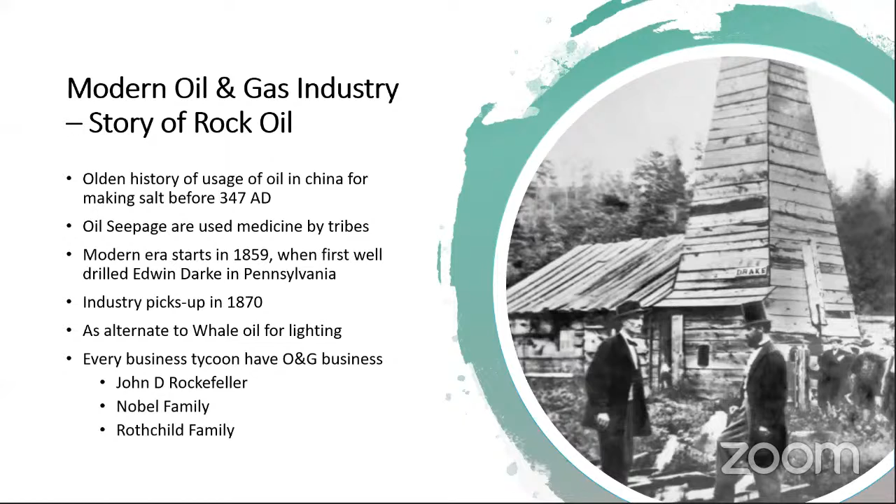And as of today, you would have heard stories that the oil price has collapsed. Maybe in the lockdown period, when it started, the oil was traded at a negative rate, negative value, because the US did not have storage space. They had to dispose of the oil, so they were selling it at negative value. All this stuff you would have heard.

And all this dynamic news that you are hearing is not something we heard only this time. It was historically common that oil prices are always dynamic due to different reasons. So when the oil industry started as lighting for the lamp in the 1870s, it faced huge amounts of dynamics because of overproduction. At that time, Rothschild and John D. Rockefeller, the main persons in that industry, tried to consolidate the industry and suppress the overproduction to control the price. It's normal in the oil and gas industry - every time this dynamic happens due to overproduction.

And in 1882, it happened that Edison came up with the light bulb. When Edison came up with the light bulb, since the usage of oil was only for lamps, people said that the oil industry was going to die - there was nothing more to it.

But eventually, before the light bulb spread around the world, Henry Ford came up with the Model T car, which used petrol as fuel. And there was a good scientist who found the way to refine higher valued petrol from crude oil. So from then on, there was a rising consumption need for oil. Every car that Henry Ford produced, and then Volkswagen came into picture, there were a lot of automobile industries - the car needed fuel, and the oil and gas industry kept on growing.

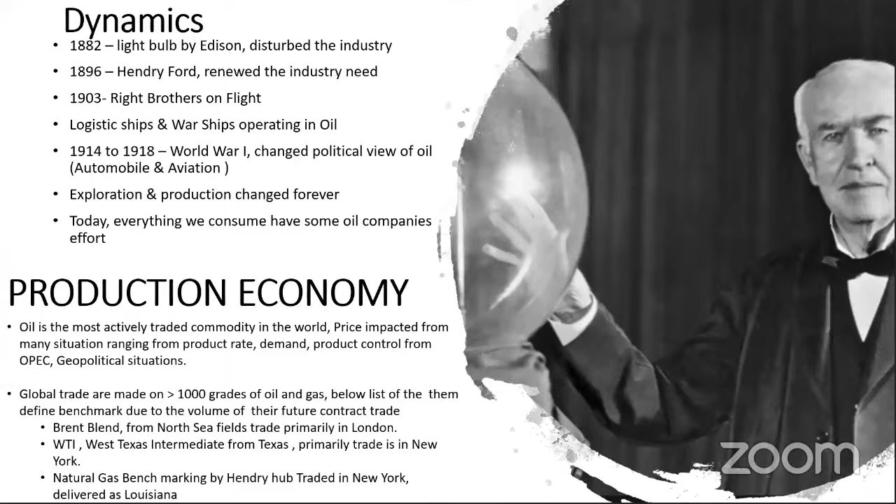So just to give a brief idea of how the oil and gas industry exists, they usually call it three streams: upstream, midstream, and downstream. What's upstream actually? Upstream is searching for oil - that's oil exploration. Once you find it, you have to produce the oil, meaning the oil is in the ground and you have to dig it and take it out - that's oil production. In the upstream section, there's a division called oil field services that provides services for people trying to find oil and take it out of the ground.

This upstream section can be located on the ground or in the sea itself - you may find oil on the subsurface of the sea or on the ground, so that's onshore or offshore. The midstream is the oil transportation technology. LNG is liquefied natural gas - you take natural gas, liquefy it, and transport it, because once liquefied, you can transport the highest volume of gas very easily. Then there's the pipeline - inter-country pipelines that run for thousands of kilometers across countries to transport gas produced in one place to another.

Today, people call the oil and gas industry 'in trouble.' Just to give you a brief introduction, the trouble is mainly in the upstream division, not in the downstream or midstream division. Even in this lockdown period, globally we had two LNG projects kickstarted. What this means is that the demand for LNG is already there in the market. Companies forecast it and are able to invest billions of dollars in that - and LNG is one of the very expensive projects in this list. So they're starting LNG projects even during this lockdown. You can consider that upstream industry production is higher, but in downstream we still have a long way to go.

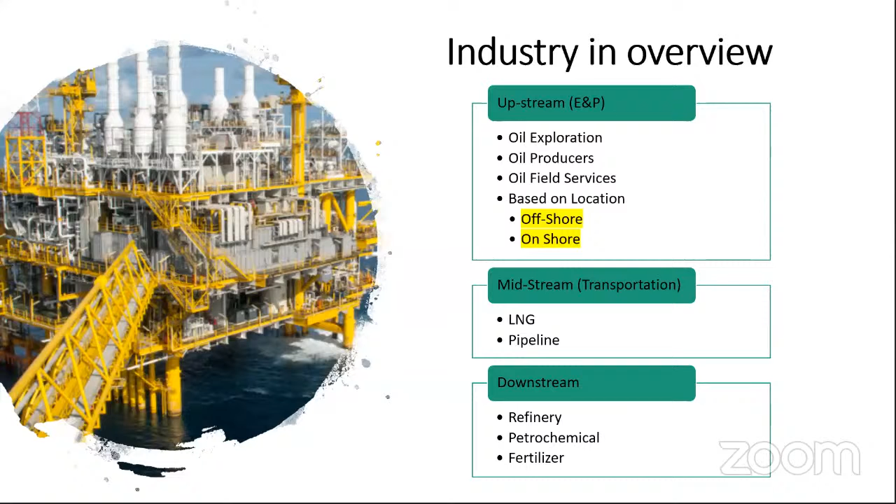So when I say oil industry, I told you about brief segregation of industry. Now you have to also know, in this segregation, usually any industry globally can be segregated into three categories. A company can be a product-based company. What it means is a company has a specified technology-based product and it is supplying the product. And a company can be a...

...project-based company. What is meant by project? A project has a unique start and a unique end, and the project is not a repetitive task. For example, if you construct a house, it's a project, or if you construct an office, or if you construct a factory, it's a project.

So the oil and gas companies can be a project-based company and a service-based company. What is a service-based company? It's a company that helps with regular operations. If you have to operate something, you have to keep on servicing it, so you may have a services company to help you there.

So any company can be a product-based company, project-based company, or service-based company. For example, when we say oil producer, who is producing oil from the ground, that's a production-based company. They are producing the oil and selling it. And exploration and drilling services, somebody who is trying to search for the oil and drill it and give it to somebody else who can produce.

For example, in the oil producers category, in India, we have GAIL. GAIL is a producer, and Cairn Energy, they are oil producers. And when we call it exploration and production, we have a company like Aban Offshore. What they do, in slang language, is kind of a borewell company. They have a borewell machine, they drill and produce, and provide you the final thing. Oil drilling is not as simple as water drilling, but it is similar somewhat.

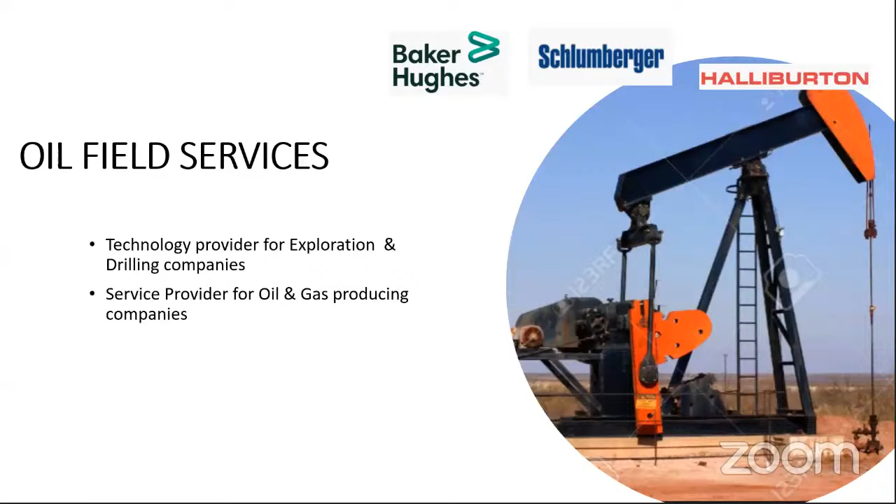Before we go on to what kind of products they make, we should also be aware of how oil is produced. Everybody would have heard the story: oil came from fossil fuel, maybe a dinosaur died and got stuck inside the ground and converted into oil. It's something similar—any organic matter buried in the surface gets decomposed and slowly converts into oil. And when we say slowly converted into oil, they call it a window.

As of today, we have never drilled the ground below 13 kilometers. Below 13 kilometers, whatever we see in our books is just what we see as per our knowledge, whatever we can do with seismograph, or whatever we can assume or postulate. The real thing is, we have drilled the ground just 13 kilometers of strike depth.

So for example, for oil, when you drill 2 to 4 kilometers, you may see oil at the surface. And when you drill 3 to 6 kilometers, you may see gas, because it is basically based on the temperature range. So when you go 2 to 4 kilometers, you may have a temperature range of 60 to 120 degrees centigrade, where oil may exist as oil, decomposing to the oil level and existing as oil. When you go still deeper, the temperature may slightly go up and you may have it in gas form. When you go further beyond 10 kilometers, mostly the hydrocarbon is going to get destroyed because of the temperature ranges. So any organic material will get converted into kerogen. The kerogen is slowly decomposed and converted into oil. And based on the temperature range or further decomposition, the oil may get converted into gas. That's how it exists.

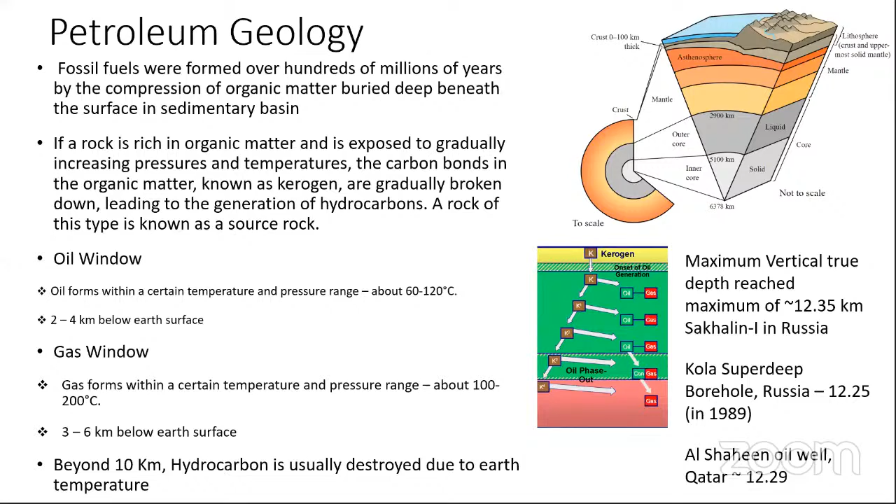So how is oil present inside the ground, and how are you able to take it out? When you say oil, you need to have 4 things. Only if these 4 things exist is there a possibility of oil. They call it a trap. A trap is something really like a trap. So you need to have an impermeable layer.

You need to have this impermeable layer. An impermeable layer is something you can assume like clay—if you have clay and pour water on it, it will not move to the other side. That's an impermeable layer. Then you need to have a permeable layer of material—this you can assume as coarse sand. And then you need to have a source rock.

The source rock is organic matter that is going to get converted into oil. Then you need to have a reservoir rock—this is nothing but a porous material, like sand, which can hold oil or water like a sponge. And then you need to have a seal, which is nothing but an impermeable layer that closes the oil or gas formed as a 3-dimensional closure.

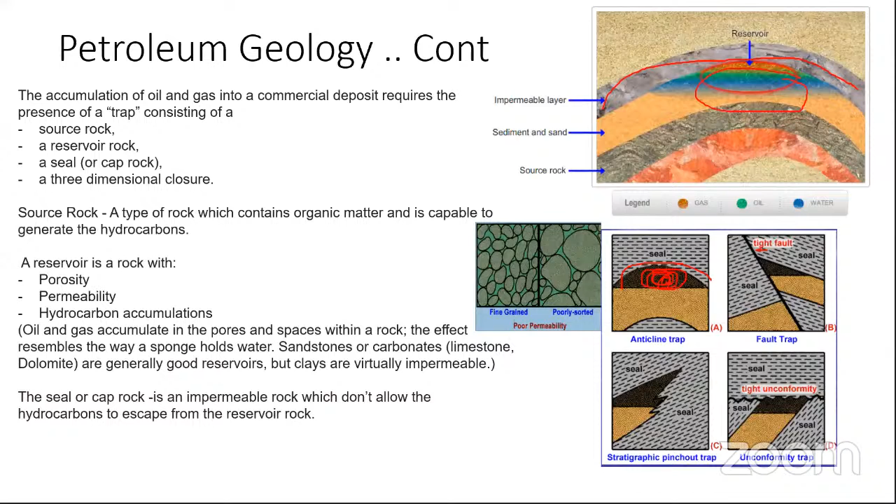Basically in the olden days, in the 1860s or 1870s, when they first drilled, they tried to find the seepage. Because of the presence of an oil trap that is already filled, the oil may seep out to the floor. When it seeps out, people would dig around that area and try to find if there's oil present. That's how it started in the olden days.

But now, how do people do it? Now people use the seismograph. You would have seen Jurassic Park - they drop a big bomb and put seismic sensors all around the area to see how the vibration is happening. Based on that, they understand what is in the ground. That's what seismic acquisition or seismograph is, done in that way.

So what we do is make vibrations in the floor and see how the reflection is happening. Based on that, we plot how our subsurface is present. When we know and have plotted how the subsurface is present, we may be able to understand the level, like the porosity of the material, the presence of a trap around the material.

And if you know there is already oil somewhere in the nearby area - seepage found, or somebody has drilled and found oil - for sure it's a potential area to explore and drill. That's how they do the exploration.

Oil exploration is always a luck-based parameter. People try to search - if they strike, it's a big hit. If they don't strike, they have to keep on scouting. And while scouting, they use different methods like this.

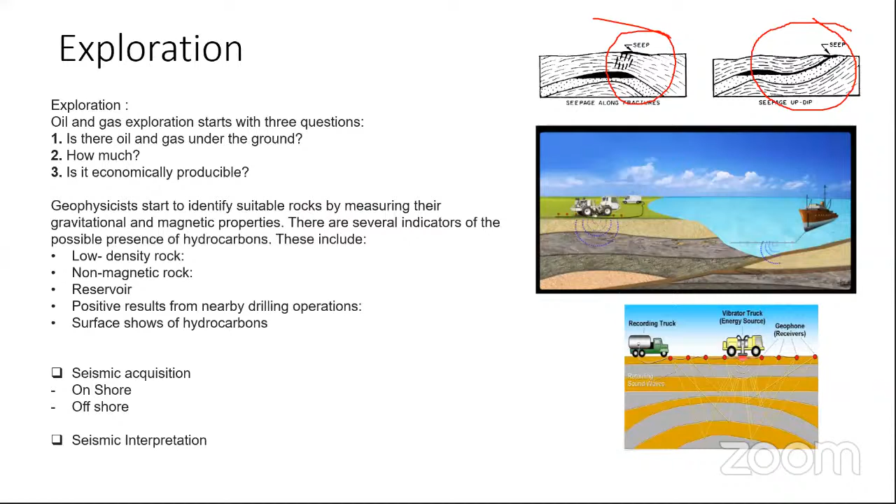So when you say you have to search for oil with a seismograph and then drill, how does the project usually work? First is exploration - you go around, search, find a potential area, and then you do appraisal drilling. So you drill one well, try to understand if something is present there, and you drill it.

And if you are able to find some resource, then you may do further evaluation on the area, that this area is a potential place. And if you find there is a justifiable amount of oil resource where you can invest the equipment to produce that oil out of the ground, then you make further developments on the commercially viable area.

What you do as development is start to drill multiple wells. You start to complete the well. When you say complete the well, you have to put all the pipings, you have to put the pumping inside if needed - if you already have pressure, the oil will come out automatically. All these things you have to engineer, and you have to buy all the equipment required, and complete the well, and then start producing the oil.

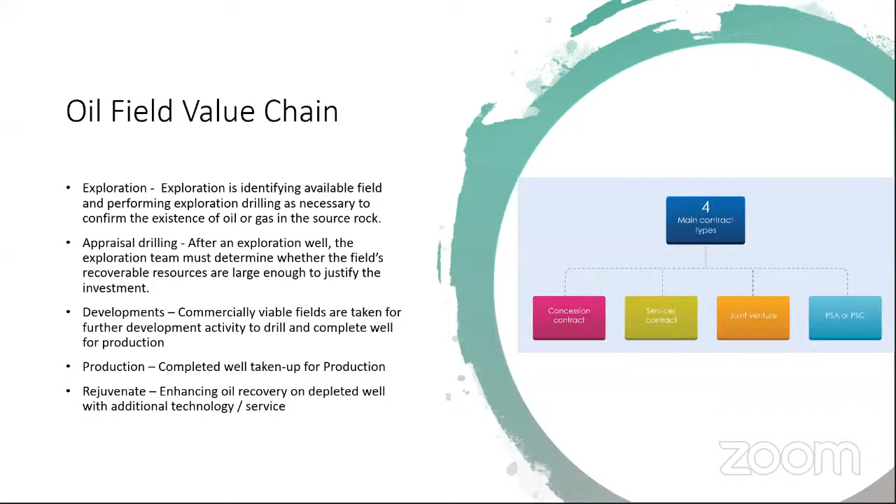After producing the oil, for sure the pressure is going to get down or something is going to happen. So you have to continuously rejuvenate it - you have to enhance oil recovery by heating them or by doing chemical injection, or different other technologies are available. This is how normally the oil field works.

So in this, how does the drilling happen? You would have seen these kinds of drilling machines - maybe it is something similar to what you see already in water drilling equipment. There is a hoisting system, but there are a lot of safety items that are completely different from what you call the normal water driller. What are the safety items?

For example, let's say you have a hoisting system. This hoisting system will connect each pipe line by line and try to push it into the ground.

Nowadays there is multiple technology. You may have a motor on the surface that drives the shaft, or you may have a motor underground itself, fixed near the bit. This motor rotates, and you can turn the direction of the drill bit to any direction, so drilling can happen horizontally, vertically, or any kind of direction. Sometimes you may see just one hole at the top, but underneath they would have segregated into different lines. That's all possible in today's world.

Then they will have a circulation system. What is this? They will have a special mud. If you see a water driller, he may continuously inject water while drilling because he just wants to cool the drill bit. But here it is different. You have to cool the drill bit, and you also have to realize that if there is oil in the ground, it is going to push out into the floor and can create a hazardous situation. So what they do is usually inject mud with very heavy density, in such a way that this mud will hold the oil even if we strike it.

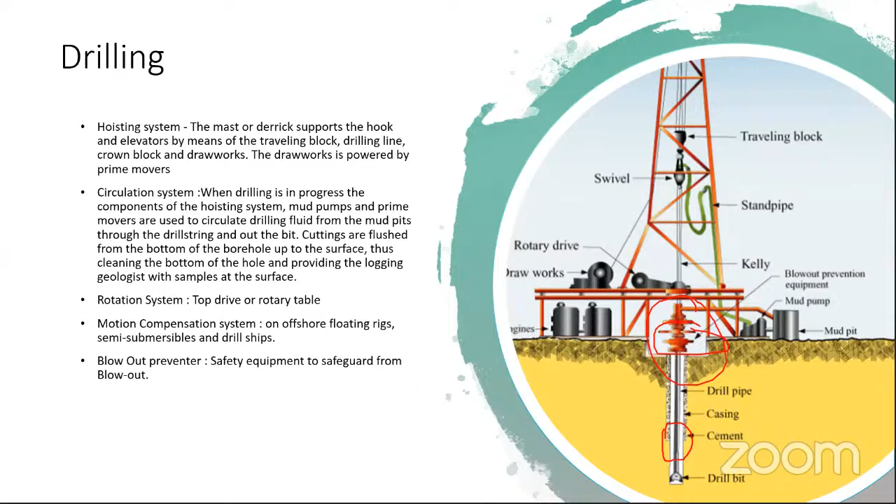So this is just one simple example I provided, but if you go deep, you will see a lot of different other equipment here. So what oil field services companies do is provide the drill bit, the motors, and the drilling fluids.

The drilling fluids, as I told you, is a special technology. For each well, you have to have a special density of mud, and for each well you have to maintain a different kind of chemical composition in the mud. That's a big study people do, and they design the muds for that. That's the mud design team.

And then there are chemicals. For example, once you drill the well and put in a pipe, you are taking crude oil through it. Normally, if you use bore water in your house pipes, you could see the pipe getting clogged very often due to deposits of salt. Here you are producing crude, and you have to assume a lot of things like asphaltenes, sulfates, whatever is there that can clog the pipe. Usually they use different kinds of chemicals to inhibit this kind of stuff.

There's another group called completions. What they do is, after drilling the well, you have to have different kinds of equipment to produce the oil. For example, after drilling, the soil should not fall back and close the well, so you need piping, but at the lower level you cannot have full piping. You need a special filtered arrangement that will send only the oil. If there is a mixture of oil and water, there are special completion equipments that will allow only oil through, stopping the water based on the density difference. So those kinds of equipment come from the completions group.

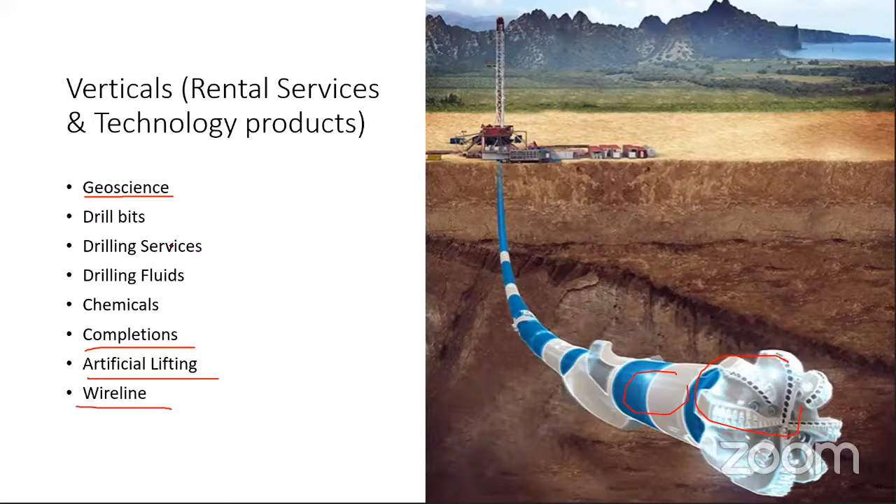So how do they supply? This is all about the oil field equipments. Next we can go to the original equipment manufacturers. Anyway, oil field equipment is also an OEM company.

They manufacture a lot of equipment like pumps, motors, and they manufacture the drill bits. They manufacture the drilling muds, those kind of stuff. And here, again, we are going to specifically talk about the original equipment manufacturer. So what are these companies?

For example, if you are going to put up a fertilizer plant, you need compressors, gas turbines, a lot of fractioning columns, a lot of special equipments, motors, pumps, whatever it is. All these equipments are not manufactured by any engineering, procurement, and construction company. It is all manufactured by the OEMs, original equipment manufacturer.

So these manufacturers, you will have for each product a different manufacturer. For example, when you say motors, ABB is one of the specialists. When you say gas turbine, GE or Siemens is the specialist. When you say compressors, Nuovo Pignone or Rolls-Royce is a specialist. So for every equipment, there is a special vendor who owns the technology, because it is not a customizable engineering every time. These are the product based companies.

So what this original equipment manufacturer does, they have their own manufacturing facility and assembly facility. They have their own technology based product, and they manufacture based on the order that comes from the engineering company that is constructing the manufacturing plant.

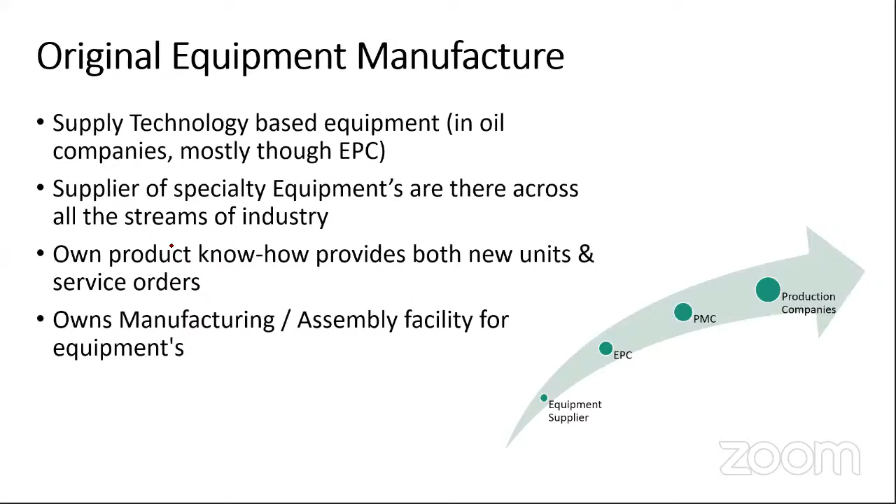Example of original equipments are compressors, gas turbines, steam turbine, valves. So in each line, each item is a core technology based product. For example, nobody buys a gas turbine that does not have a proven lifetime. If I have to sell a gas turbine in a market, I have to have a history of running hours. If you are going with a new product, the market won't absorb it easily unless you have higher experience in doing that. Those are special technology based products.

Similar to a car, it's always expensive because on that size of range, it's a proven car. So each product here is a core technology owned by that special manufacturer. Most of the time, they manufacture the product and deliver it to the customer, maybe the engineering company constructing the manufacturing facility. After delivery, the end user running the manufacturing or production facility has to contact these vendors again to do the services.

For example, if you have a gas turbine compressor, GE is building it and giving it to Saipem, which is the EPC company. Saipem may buy it from GE and assemble it in their equipment, make a final manufacturing facility, and hand it over to, let's say, Indian Oil. Indian Oil is going to produce the oil through that factory. During operation, Indian Oil is supposed to again contact GE, the equipment supplier, for any replacement of spare parts, because all those spare parts are specialized equipment. So that's where the OEM comes into picture.

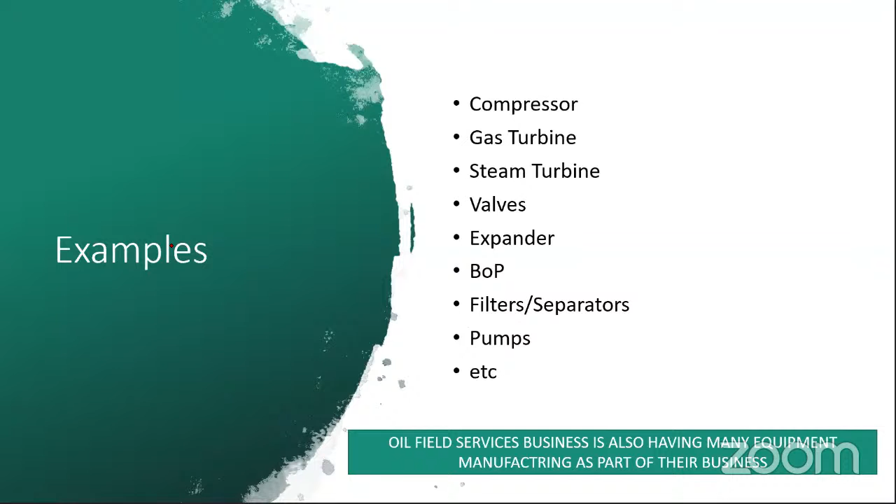So how do these OEMs operate? Usually these big OEMs, I would say big OEMs because there are a lot of small OEMs like ABB, they manufacture the motors. They manufacture only the product. They don't customize anything for the customer needs.

But there are very big OEMs like GE or Baker Hughes. They customize - they have a product with the technology, but they customize it based on the customer need. So what do they have? They have a product-based division. What does this division do? They find what is needed for the market.

For example, a gas turbine - they have a 50 megawatt turbine. Right now there is demand for 55 megawatt, so maybe they have to do something to this machine. That's what they do first, as a market survey. Then they initiate a project for that, and they do the improvement on that product. Before transferring it to the project organization, they make sure they test it well. Then they transfer it to the project-based team.

What does this project-based team do? They talk to the customer to understand if there is any additional customization. When I say additional customization, they will not touch the product, but they will do something surrounding the product. For example, if you have a gas turbine, it will remain as it is, but for the gas turbine you will have a lubricating system - you can build it in carbon steel or stainless steel based on the customer need. So those kinds of customization are done by the project-based group.

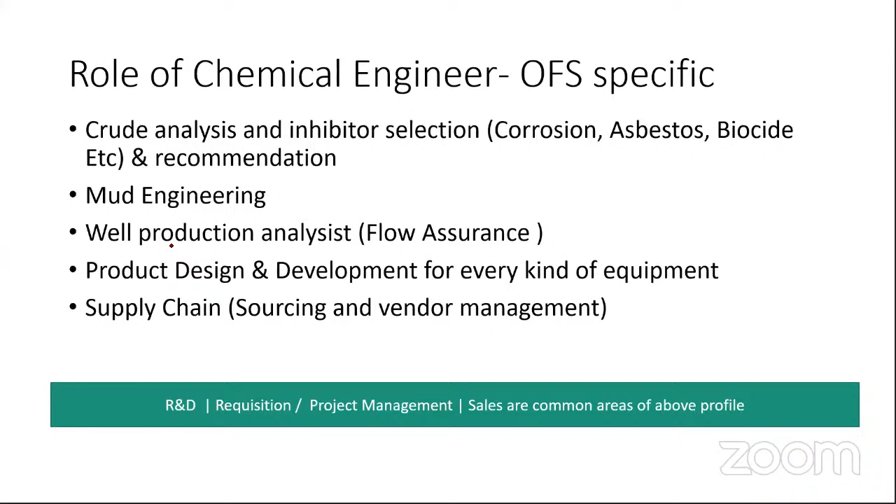So I think I have given you some brief idea, I hope. If you have any questions, I'll try to address them possibly. I don't know if I have bored you.

Yes, sir, thank you so much. I think you've given a very deep knowledge on this, especially on this equipment and the manufacturer. Definitely, I think all the students are in the final year, so maybe it will be very much useful for them because they're going to step into the next level of a career.